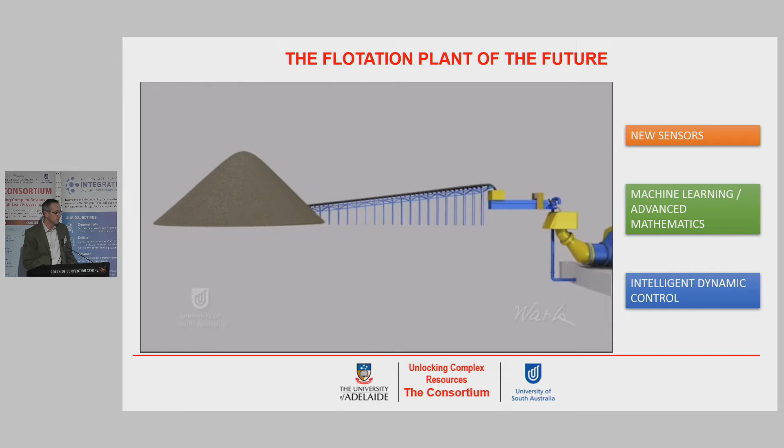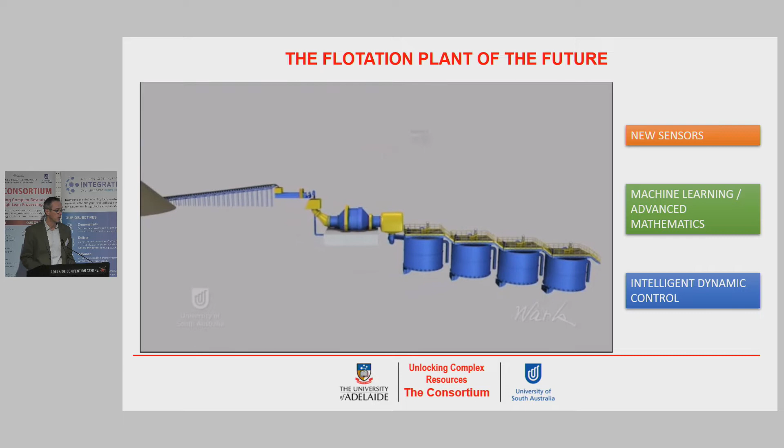So the flotation plant of the future - we can imagine that it will have a lot of new sensors positioned at different points around the concentrator. Inside the flotation cells and in different critical elements of the circuit, we will have new sensors, and these sensors will send information to the control room in real time. So we'll collect a lot of information about the process, which will flow to the control room.

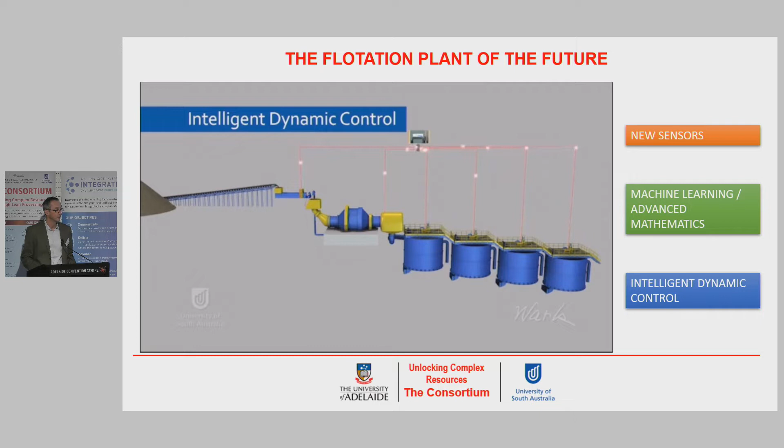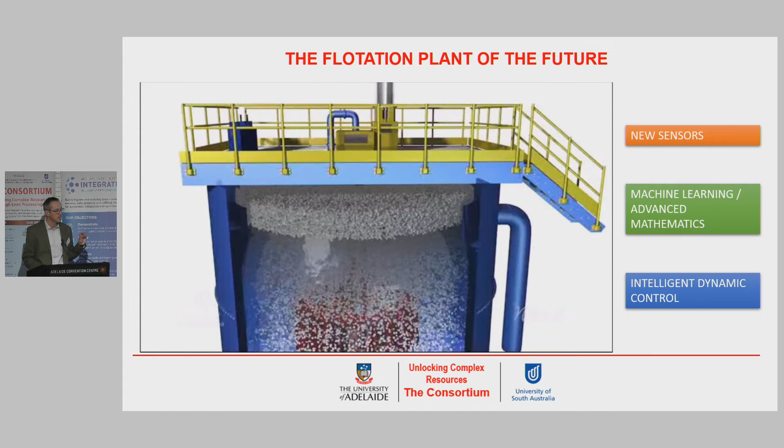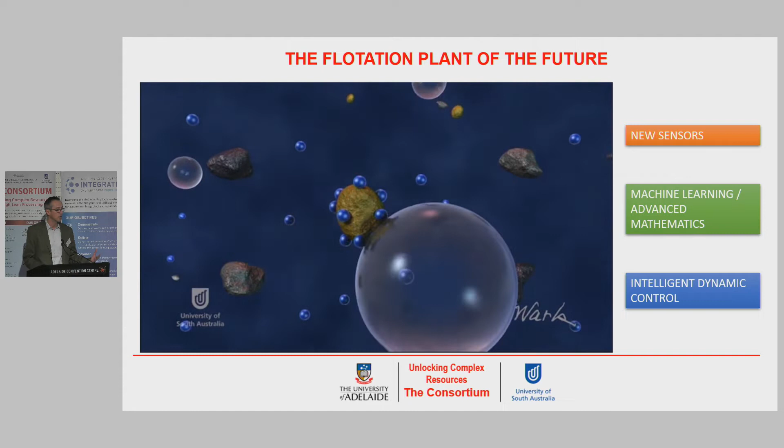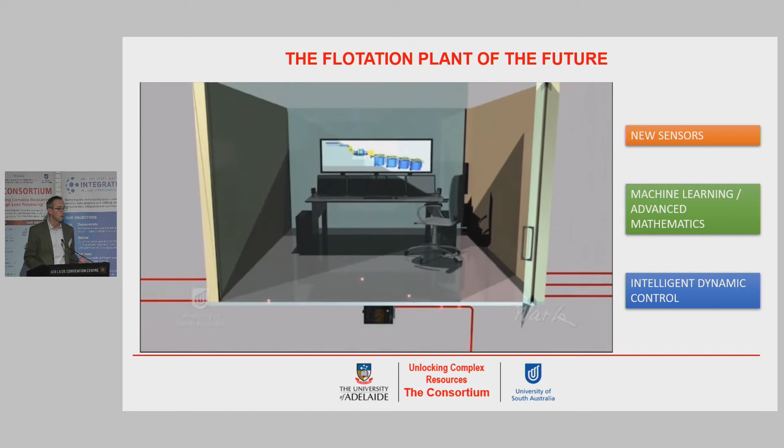And then in the control room, we will have advanced mathematics to process the data. But what do we want to see in the future concentrator? We want new sensors positioned to investigate inside the flotation cell, see what's happening to particles, investigate the chemistry of the process - how collectors are adsorbed on particles, how they become hydrophobic, and are transported to the concentrate. And to have this information real time from inside the flotation cell, traveling to the control room, where we can process the information and adjust the operating conditions to the optimum. That's, of course, our final goal.

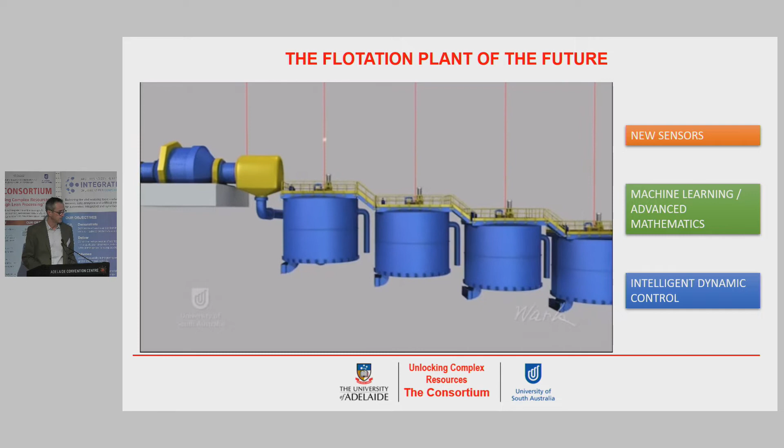So how do we get there? To get there, there is a need for new sensors - we need to sense parameters which currently are not properly measured. We need advanced mathematics and machine learning to achieve what I refer to as intelligent dynamic control. It's an interesting term because dynamic means real time, and intelligent because it's guided by artificial intelligence. So by a combination of new sensors and advanced mathematics, we will get to the flotation plant of the future.

Now, 20 years ago, a scenario like this was science fiction. Now, we are actually not that far from that, because all modern concentrators are already designed and built around this concept. But what can we do better? It's new sensors, and making better use of the information collected by these sensors - so better mathematics and better data analysis.

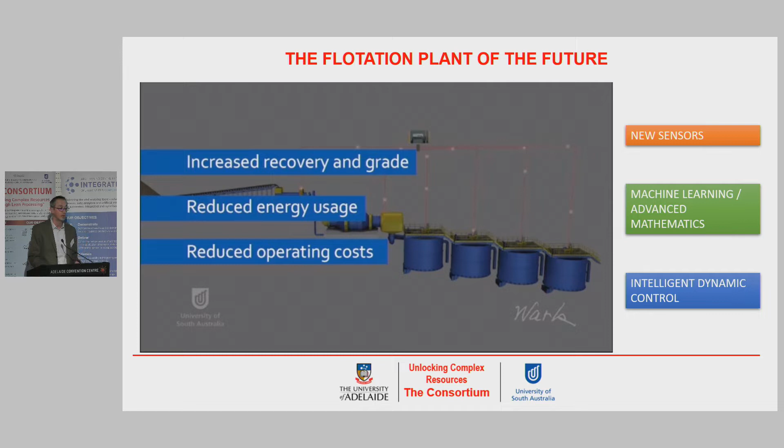So the question is, what are... why is people laughing? Right, okay, I have to say something. Someone may notice some resemblance between one of the wise men of flotation down there and Chris Greet.

It is just a lookalike. I don't want to be sued by Chris for using his image for my own purposes in my PowerPoints. It's just a coincidence. It is a lookalike.

But anyway, what should we sense in flotation? There are 3 different categories of variables which are really relevant. The first category is feed variables. We measure the composition of the flotation feed, which could be the chemical analysis, copper grade, for example, but also solids percent in the slurry, throughput, particle size, and possibly liberation of the different minerals.

Then we have process variables, where we measure the dosage of reagents, energy to the flotation cells, air flows, froth depth, and so many other things. And then some other relevant parameters, which is froth stability or characteristics of the froth, and mostly pulp chemistry, pH, EH, and DO. I put them in a different color because at the moment, yes, they are measured, but not everywhere and not in the right way, and not all the information is used properly, because we need to remember the message which is down there that the wise men of flotation tell us.

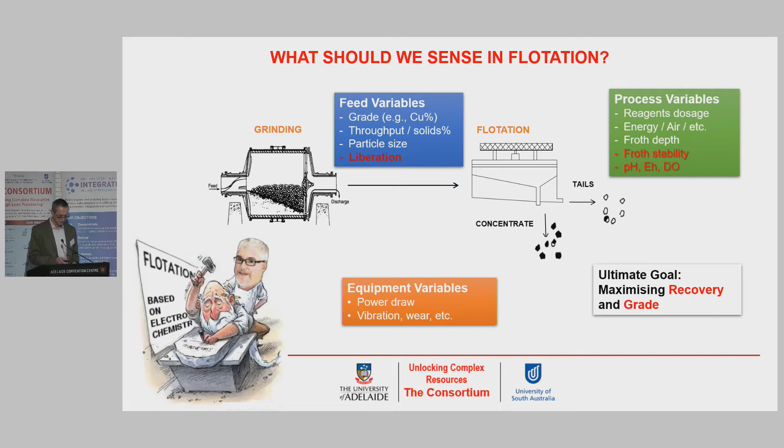So sensors for equipment monitoring, I consider them the low-hanging fruit, but they are very important. Basically, they're just there to detect abnormal events. And here I have just an example. An example of a sensor for abnormal events is acoustic monitoring of cyclones.

A very similar thing could be achieved, for example, with the new sensor that Defang was presenting this morning. It can be used to do the same thing, just to detect an abnormal event. The cyclone is not performing well anymore. We need to intervene as quick as possible.

So this is an example of an acoustic system which is out there, which is the CiDRA Cyclonetrac. Basically, by detecting an immediate change in the sound pressure, that means the overflow is changing. There are too many coarse particles in the overflow. We need to do something. So they are done to identify as early as possible that the equipment is not working as it should.

As I said, this is just one example. There could be many other things. I want to say in my discussion today, I'm just using some existing technologies which are functional to my discussion, but it's not a comprehensive overview. There are many others, and I'm not putting one on the top of other technologies. They're just there to explain what I'm going to say. So this is one example.

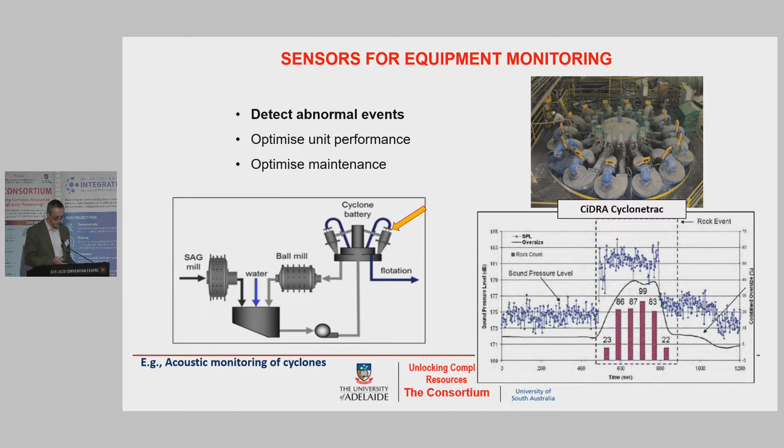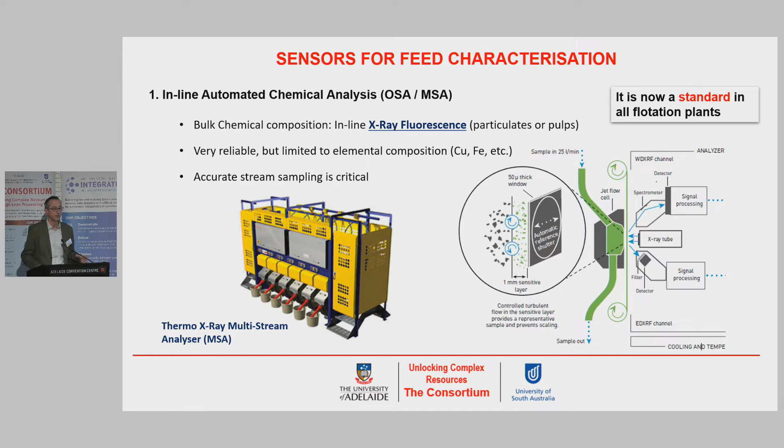Sensor for equipment monitoring. Then we have sensor for feed characterization, and I have to say this is now a standard in all flotation plants. So all flotation plants have, as an example, inline chemical analysis, the OSA or MSA system, which is based on X-ray fluorescence, XRF, and give us real-time chemical composition of different flotation streams. So we know our copper grade in our feed, concentrate, tailings, and whatever is needed in a concentrator. So definitely this is in the flotation concentrator of the future, but already is in most of the current flotation plants. So nothing new there.

But then we may want something more, because we know that flotation is very sensitive to particle size, and therefore very recently there has been a lot of interest in having inline and real-time particle size. And within the PRIF we have something like that as well.

So a couple of examples of how this can be done. There is automatical particle size done by laser diffractometry, which is a system which is out there and marketed by Outokumpu. It's basically like having a small Malvern Mastersizer embedded in an instrument which can put on site. So it's based on laser scattering. It can give a continuous particle size distribution, but at the same time it requires high dilution because laser scattering works at 1% solids. So it's very critical the way you collect your sample for particle size analysis from your stream.

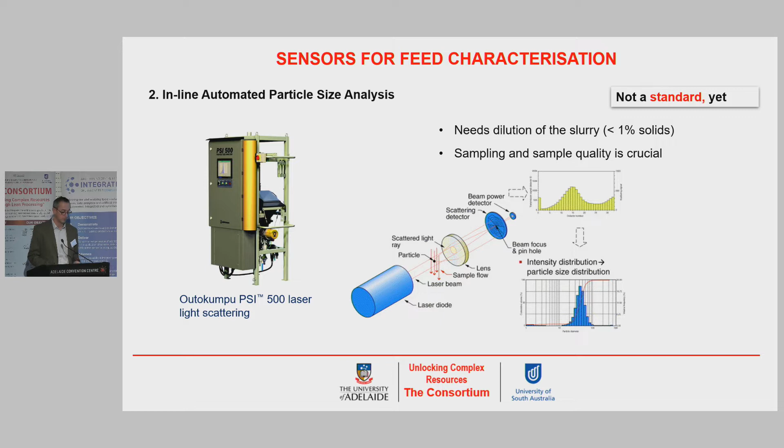And then there is ultrasonic attenuation. As an example, there is the instrument from Thermo, which uses a different mechanism to achieve the same thing, particle size. And there is something there. So I would say it's growing, and the flotation plant of the future will definitely be equipped with inline automatic particle size, not only for the flotation feed, but in different points of the circuit. So we will see more and more of this, and different technologies and different methodologies to achieve that.

And again, I go back to Defang.

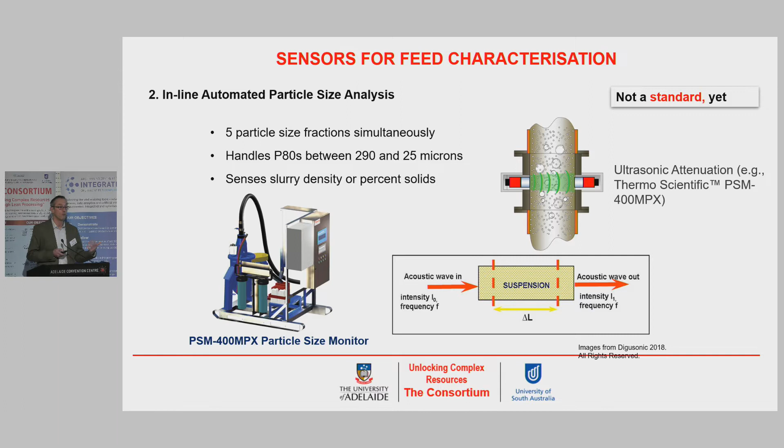There is room for improvement in this area. We have chemical analysis, but in flotation we actually float minerals, so we'd like to know the mineral composition of our flotation streams. We don't just want to know where copper is going, but where chalcopyrite, chalcocite, and pyrite are going. We want to distinguish between minerals.

So we want inline mineral assays. This can be achieved, and there is something already around. Some concentrators already have something like that in place, but it's not yet a standard. I would say in the flotation plant of the future, this will be a standard. Everyone will have mineral assays.

This is currently achieved, again with a couple of examples, by using near UV visible light. To complement the XRF data of the OSA, we have UV visible, which can interpret the information and give us the mineralogical composition. It can be very useful if we want to trace specific minerals in our flotation circuit. This will definitely be a standard in the future flotation plant.

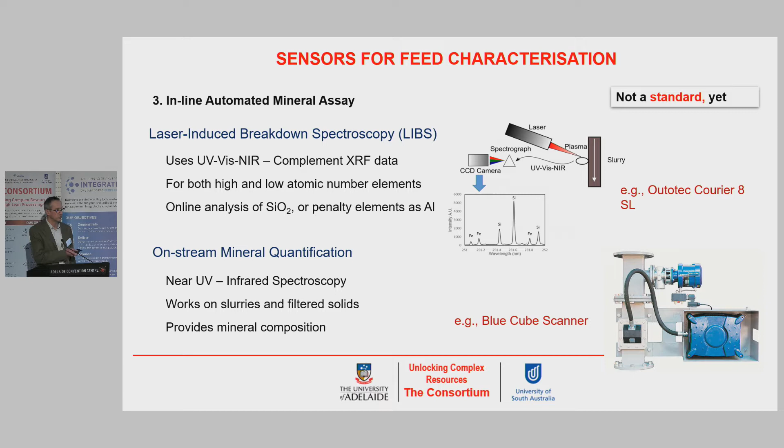But then one extra challenge: it's very important in flotation to measure liberation of mineral particles, because liberation of your value mineral will dictate your final recovery and concentrate grade. At the moment, the only standard way to do that is using QEMSCAN, which is very accurate but offline. It takes a couple of hours minimum, because you need sample preparation, put it under the instrument, take a measurement—so it doesn't give you real-time liberation.

So in the future, we will definitely have real-time liberation in the flotation plant. How do we get there? There is some research around—some promising, some less so—and I'll give a couple of examples I found very interesting myself.

One approach is using XRF as if it was a digital camera, taking an XRF photo of your sample, so that each individual pixel is an XRF signal with a different color. You can basically map the composition of your sample and identify different minerals, their composition, and liberation. At this stage this is really far from being available, but there is research around it, and it was very interesting as a concept.

And then we have microtomography, which is already used for liberation. It has, at the moment, similar problems as QEMSCAN in terms of being inline and immediately available. If you're familiar with tomography, you need to take a lot of projections of your sample, so it takes time—collect a sample, take it to a measuring chamber, take many projections, and reconstruct the 3D composition of your sample. It takes a couple of hours.

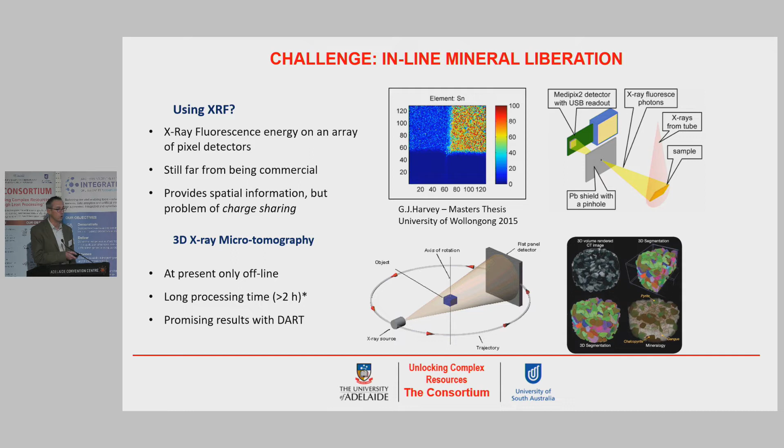And then froth visual analysis. This is very interesting, because froth visual analysis has been out for at least 20 years now. Every concentrator has, or used to have, froth cameras, but the use currently made of all the information that could be collected by froth cameras is minimal.

You go to concentrators, and most of the time froth cameras are there just to detect if the cell is producing any concentrate. Is it flowing? Is it not flowing? There is something wrong.

But all the useful information we could get in terms of composition of particles on the froth, bubble loading, and correlating visual analysis to concentrate grade and recovery, we are still behind because we don't use that information as well as we could. A lot of work has been done recently, and there is room for improvement in terms of using artificial intelligence to interpret the data from visual analysis.

And be more able to predict what's happening in the concentrator. Metso, for example, you're probably familiar with VisioFroth, which is considered to be the standard for visual analysis, are recently marketing a unit called FrothSense Plus, and they claim they use artificial intelligence and they can achieve these goals much more efficiently than in the past.

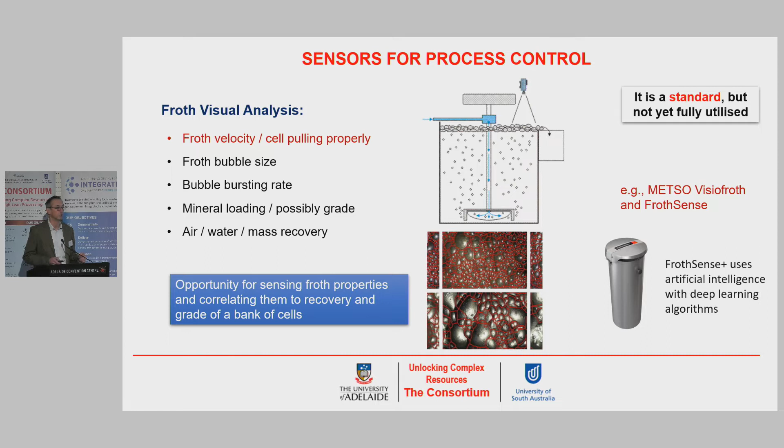But there is a lot which can still be done to improve the data analysis and what we can get out of visual analysis, because at the moment it's underutilized in most concentrators.

And then we move to pulp chemistry, and inline pulp chemistry, it's been one of the targets and goals within the PRIF, because it's very important. As we said before, we need to measure pulp chemistry if we want to have the process right. At the moment, pH, Eh, and DO are concepts that in some concentrators have meaning and they make use of them, in others they don't.

pH, there are probes everywhere, but maintenance is poor, they're not maintained and cleaned, and you need always to think that if in your plant you have your pH steady at target 7.5, and it's been steady at target for 2 months, that doesn't mean you have control of your process. It means your probe is broken. You need to go there and check that the reading is real.

So it's very interesting what Magotteaux has been designing in the last years, which is the MagoPulp, by which we can have a more reliable and continuous measurement of pulp chemistry, and pH, Eh, and DO in the plant of the future will be standard as a continuous measurement.

And inclusion of these parameters in data analytics and in machine learning, because it is ultimately chemistry which dictates recovery and grade. So this information will be available online. We are not far from achieving that, and the PRIF has been helping in this space, so it's very good, and we should be proud of what we are doing in this area.

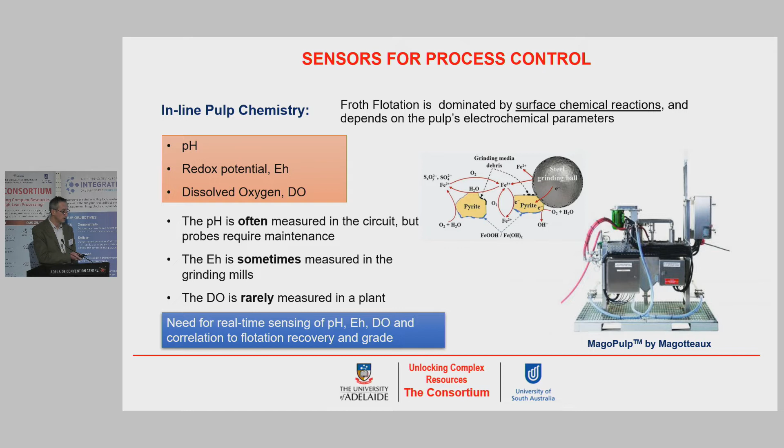And new pulp chemistry. I wanted to select just 2 of the very interesting talks which will come after mine as an example of what I strongly believe, and researchers in the PRIF believe, is that the future for sensing around flotation will improve sensing around pulp chemistry and what's related to chemistry.

So you will hear from Todd, for example, that it is possible to achieve real-time sensing for frother concentration in the system, which will be great, because then we know if what we are adding is doing what it's supposed to be doing. Maybe that can be extended to collectors, a step forward, so we know if our collector is going to the mineral surfaces, or if we are just wasting money throwing in a lot of xanthate, which is doing nothing to the system.

So having this real time will be a step forward, and I believe that this will be in the concentrator of the future. And again, what Linda is doing, detecting critical ions in the system.

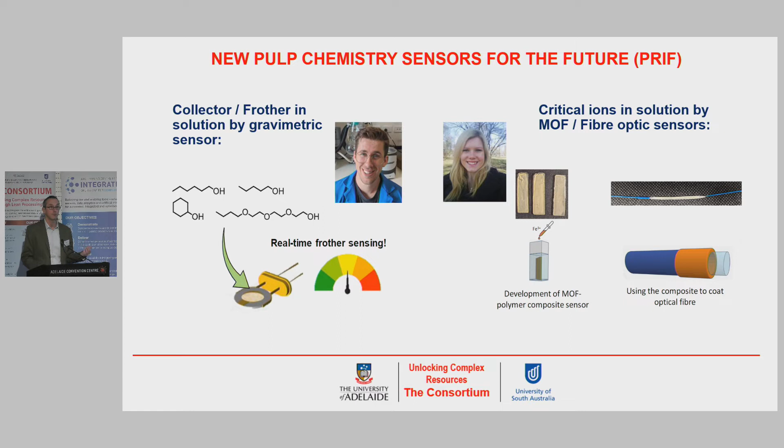She's doing that now for leaching and detecting ferric ions, but that may find applications in flotation as well. We may be able to have a sort of fiber-optic sensor which will tell us your pyrite is getting activated and it's floating, your chalcopyrite is oxidizing, and we can control that because we can have real-time measurement of ions in solution. So in the future, sensing of chemistry will be definitely there and stronger in the flotation plant of the future.

Now, to conclude, how to get there? What's the step? Well, Adrian this morning explained this concept in a much more educated way, giving a lot of examples of how this should properly happen if all people involved are doing their part.

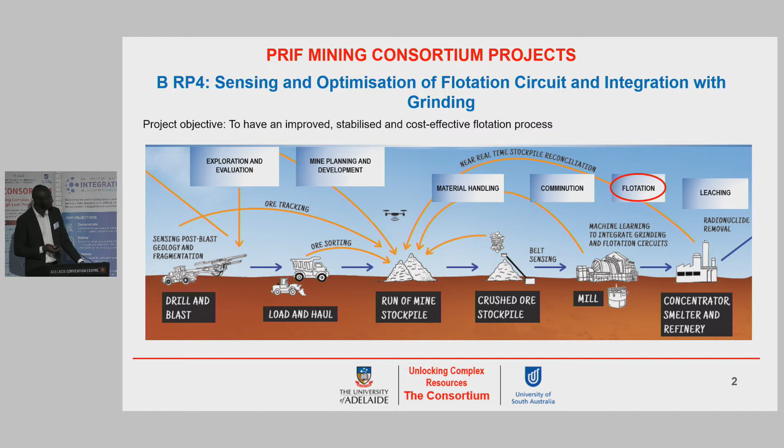Since the commencement of my project, these are the main key findings that I have. The first one is that Gaussian process regression model can make good copper recovery and grade prediction. The second one is that Pareto search algorithm finds the optimum operating point that will see to the maximization of copper recovery and grade.

And finally, we've been able to ascertain that pulp chemistry indeed is very essential when it comes to the prediction of rougher copper recovery. And these findings are useful.

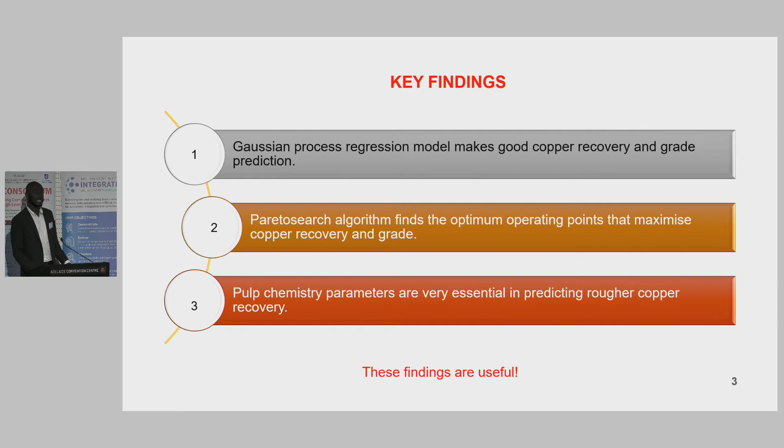So just like in the world of sports, no coach would like to change his or her winning team. Likewise, on the plant, it's not advisable to play with your set parameters or set points of variables. But with the model that we have, we have the flexibility to simulate rougher copper recovery and grade.

And this will give you an idea of what to expect when you are to vary a particular variable in a range. Ultimately, the model that we have at the moment can be integrated into a model-based predictive controller, and this will help to have process control of the system.

In model-based predictive controller, what happens is that the predictive model of the system is used to predict the future behavior of the process, and they are very effective for multivariable processes like flotation.

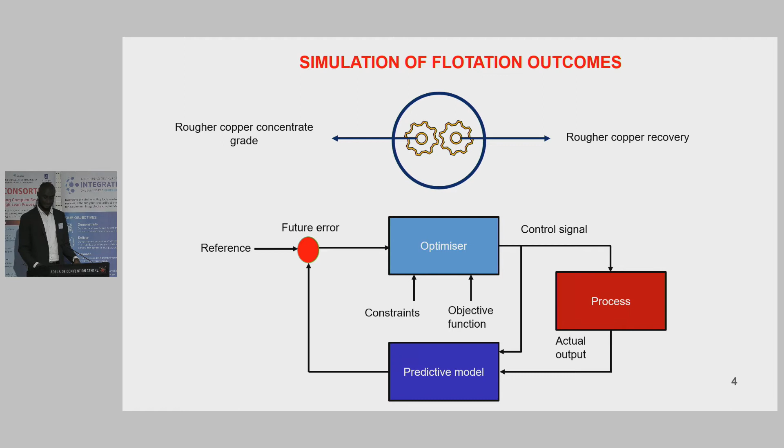We know that fluctuations in the performance of flotation mostly emanate from the operation of the various variables at different set points. So with the optimum values that we have at the moment, we hope to have a more stabilized and robust flotation process on the plant.

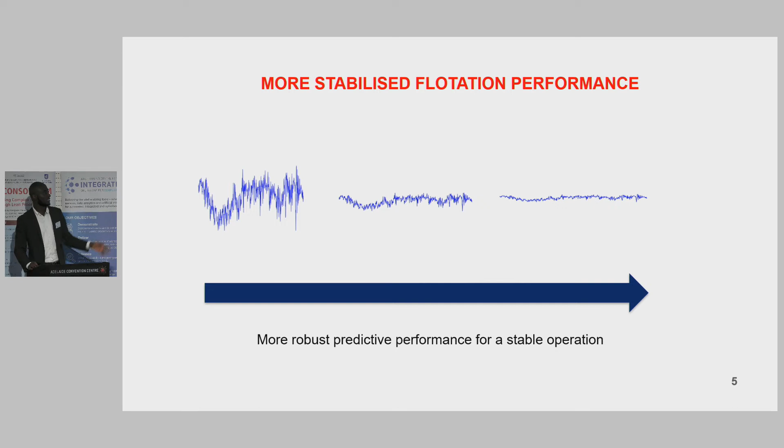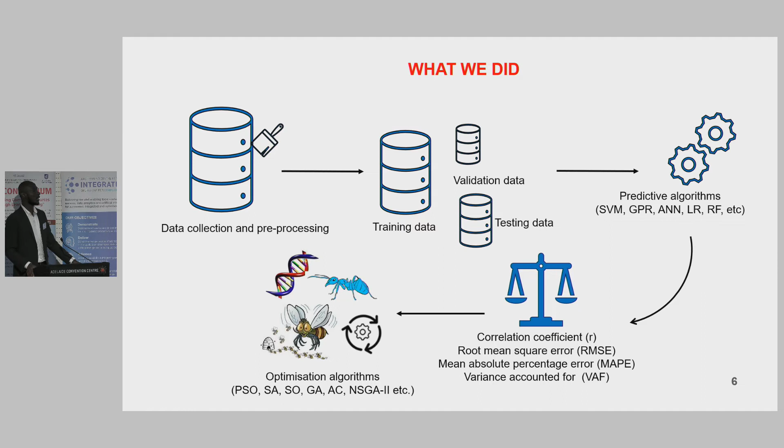Basically, these algorithms operate by first establishing a correlation matrix between the various input and output variables. Based on this correlation matrix or predictive function, it's able to make new predictions when you give it new data. After the development of the models, we have standards that are used to assess the performance of the models.

And the standards that we considered in this work included correlation coefficient, root mean square error, mean absolute percentage error, and variance accounted for. So for a good model, we expect the R values to be approaching 1. In terms of the error statistics, we expect them to be minimum as much as possible, approaching 0. And for the variance accounted for, we expect values close to 100%.

So after the assessment, based on the best performing model, we extract the predictive function of that model, and we use that predictive function as the objective function for optimization. For optimization, there have been previous presentations that talked about the operation of optimization algorithms, so I'm not going to talk about that here.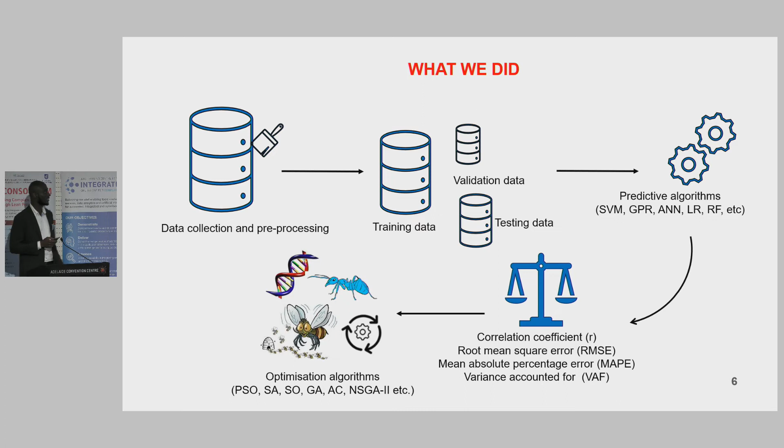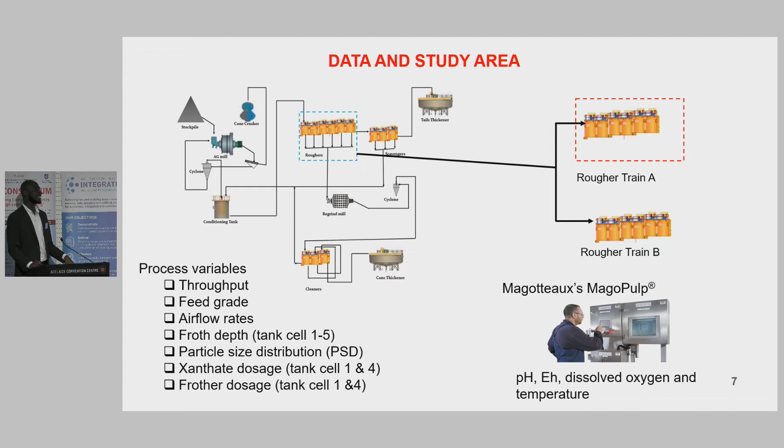So this is the data and study area that we considered in our work. We collected the data mainly from the rougher circuit of BHP Olympic Dam, specifically from the rougher train A. We also made use of MagoPulp in collecting pulp chemistry data in terms of pH, EH, dissolved oxygen, and temperature. So these are the main data sets that we considered in our work.

So this image here shows the prediction that we did with our model in terms of copper recovery and grade. And looking at the statistics, it shows that our model is actually doing a good job when it comes to the prediction of the output of the process at BHP Olympic Dam.

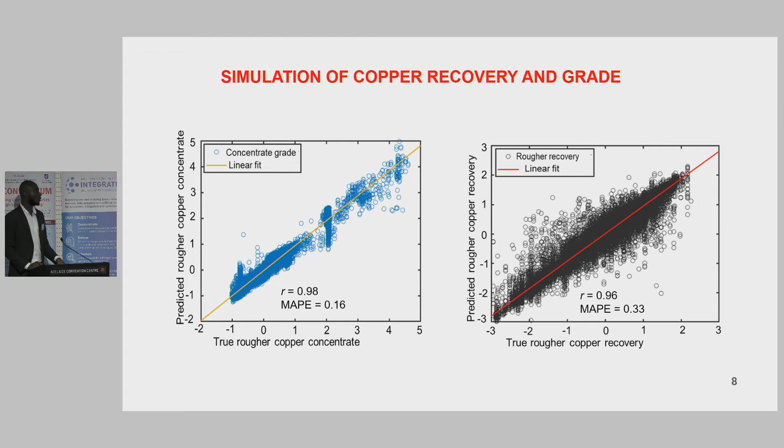This work also shows we wanted to ascertain the impact of feed grade and feed particle size on the optimum values that we have. Because as much as we have optimum operating values for variables like feed grade and feed particle size, it's very difficult to keep them at a particular value. So we did a simulation where we varied feed grade and feed particle size simultaneously, but kept all other variables at their optimum values as found by the various optimization algorithms.

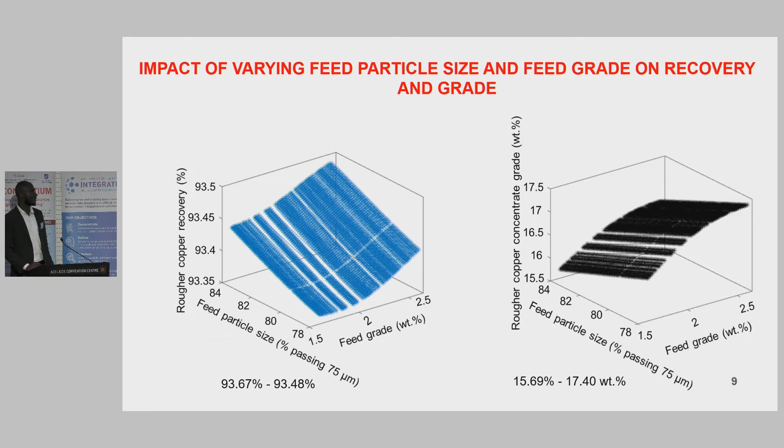And from these results, we realized that if we are to go by this approach, we can have a near optimal recovery and grade with the values that we have at the moment.

So going through literature, we realized that even though machine learning models have higher accuracy and very good predictive performance, the work done so far mostly wouldn't include pulp chemistry parameters. So with the little data we have on pulp chemistry from BHP, we first modeled with just plant variables, shown in the image on the left. After that, we included the pulp chemistry variables in terms of pH, EH, dissolved oxygen, and temperature. And from this slide, we can see an improvement in the performance of the model that we developed.

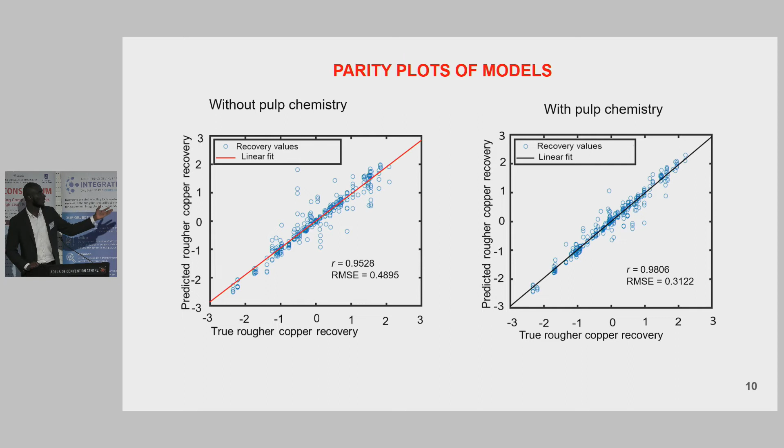So future recommendation is that, to date, we know that pulp chemistry is very essential when it comes to the prediction of the recovery of the process. However, we have very little data at hand. So we recommend that more data on pulp chemistry should be collected in order to validate some of the work that we have.

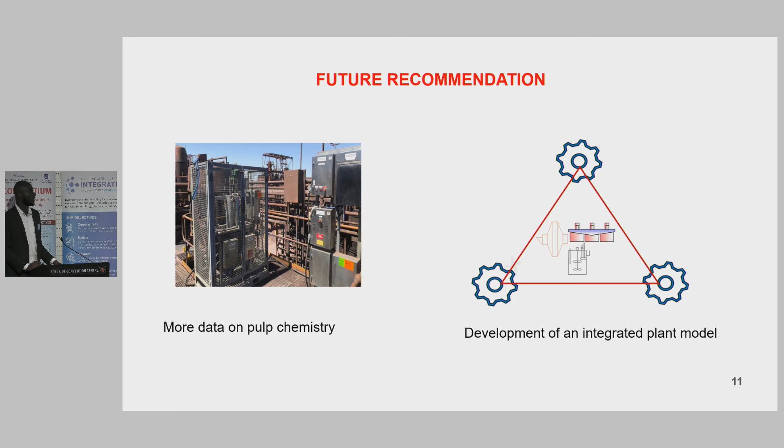And also, since the Gaussian process regression model has proven itself when it comes to the prediction of the metallurgical output of flotation, we are also recommending that models should be built for the grinding circuits and the hydromet section so that overall we can have an integrated model for the plant.

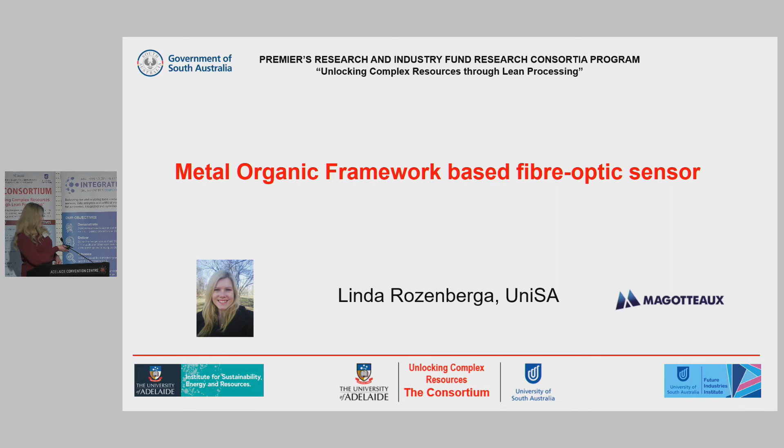The goal of this project is to develop a sensor that can quickly and accurately measure how much iron 3 we have in leaching processes.

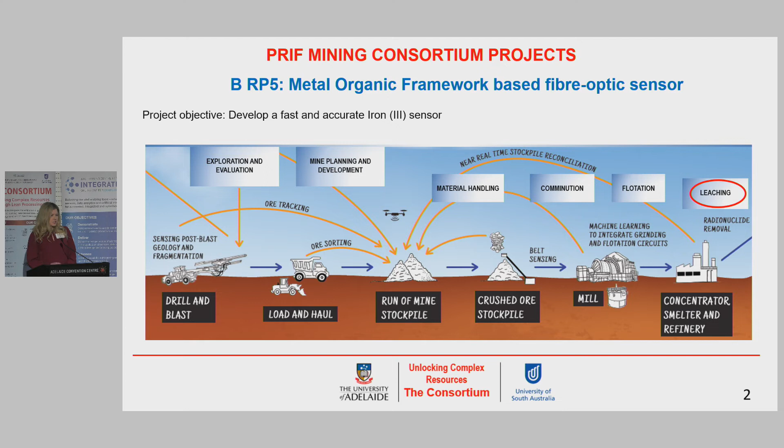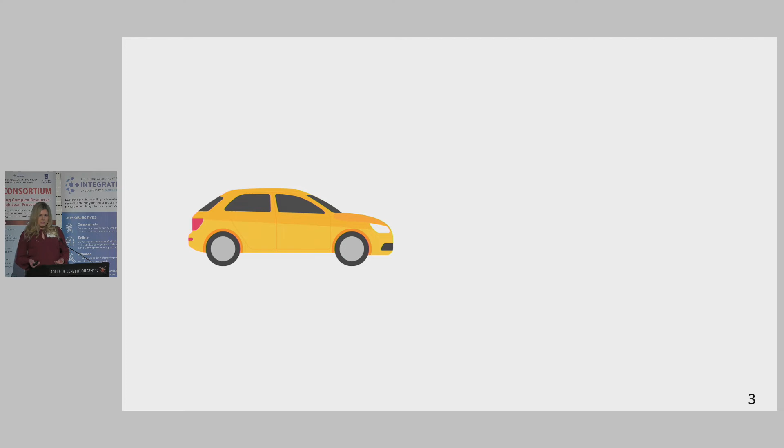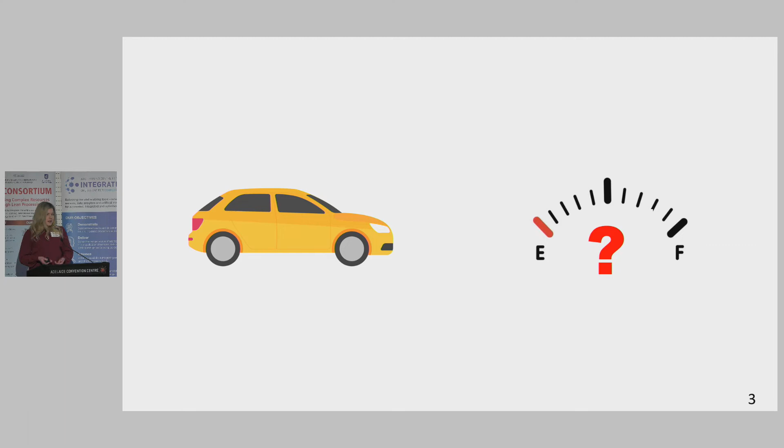But before we get into the science, I would like to invite you to think about our everyday lives. Many of us have a car we use to drive to work, and we rely on a fuel gauge to let us know how much fuel we have left. Imagine if we didn't have that. If we get in the car in the morning with no idea how much fuel we have, are we going to get stranded on the side of the road, or are we going to stop at the petrol station unnecessarily and waste our precious time?

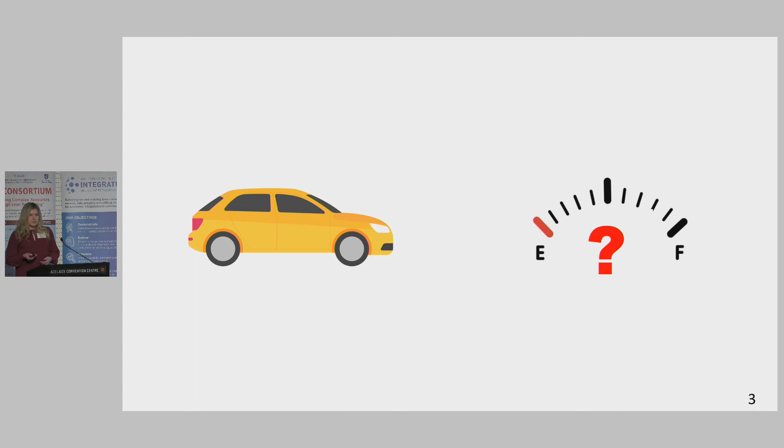Or another example: let's say you're not feeling well and your doctor asks you to do a blood test. A typical blood test would take about 3 days to get the results back. But imagine if it actually took 3 weeks, and what effect that could have on your health.

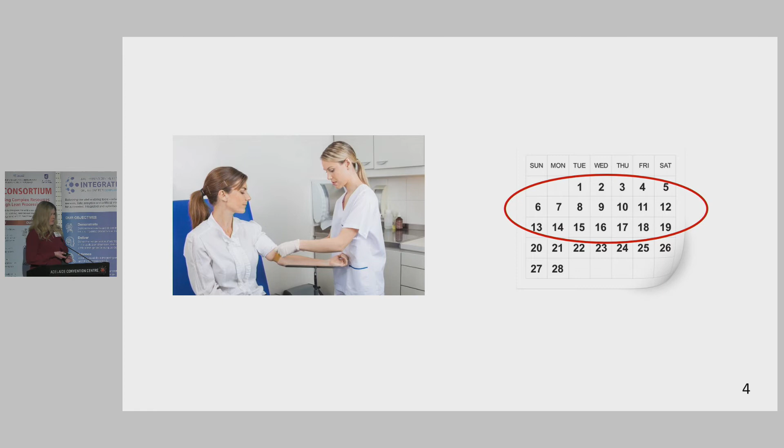So we don't want to face risk and uncertainty in our everyday lives, so why would we allow them in the key processes of the business?

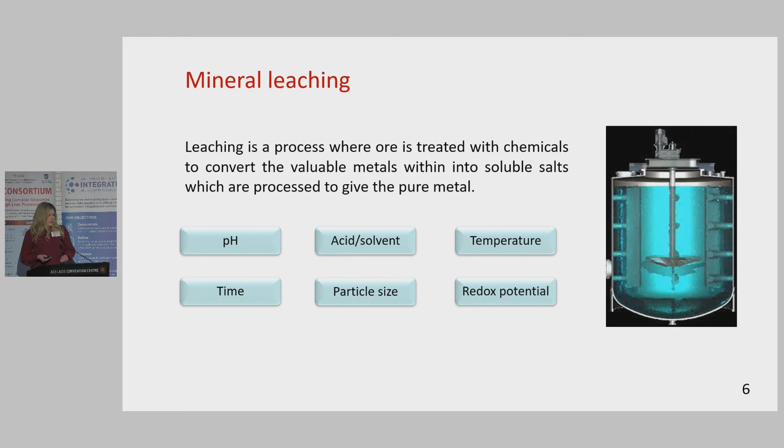Now let's return to mineral leaching. It's a process where we dissolve the ore in acid or solvent to recover the valuable mineral, and it is governed by several different parameters since it's a chemical reaction. For example, pH, time, and temperature, which are fairly easy to measure and control. Others are a bit more tricky, like particle size and particularly the redox potential.

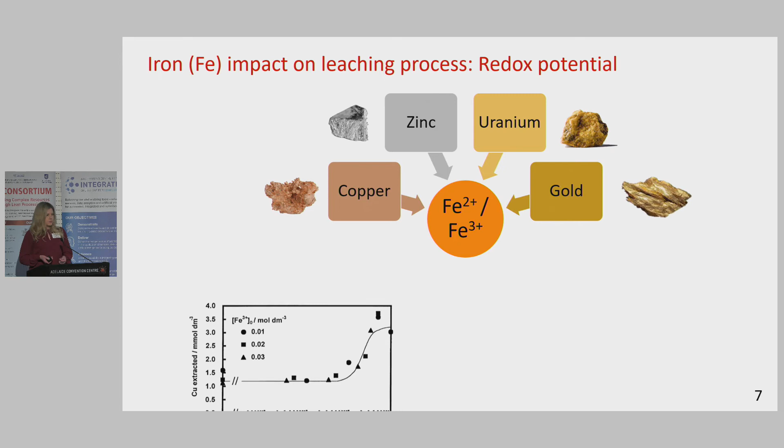In the leaching process of copper, zinc, uranium, and gold, the redox potential is controlled by the ratio of iron 2 to iron 3 ions. For example, a study done in 2001 showed that optimizing the iron 2 to iron 3 ratio in copper leaching allowed the authors to increase copper recovery up to 3 times.

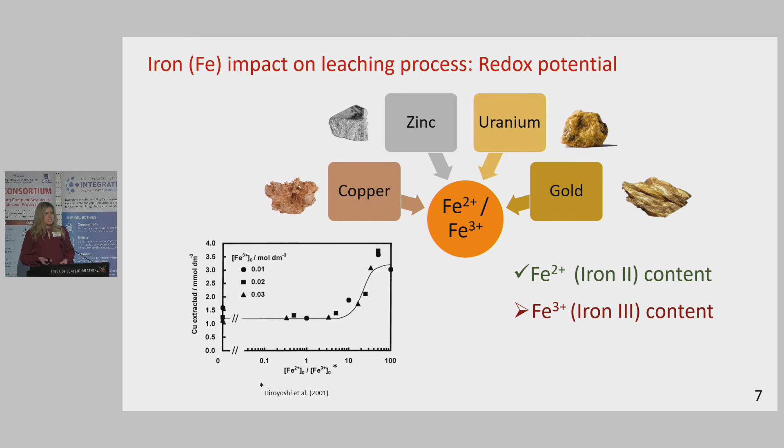We have good, reliable methods to measure iron 2 concentration in solutions. However, iron 3 concentration is a lot more difficult to measure. It requires extensive sample pretreatment, expensive and complicated equipment, it's a long process, and often the measurement we obtain is not exact and precise because we're not determining the iron concentration directly.

So as an alternative, we are offering to develop a luminescence-based sensor. Luminescence is the ability of some materials to absorb light and then emit it at a different wavelength, and you might be familiar with these materials as glow-in-the-dark materials or paints. Luminescence sensors are known to be very fast, accurate, and selective.

So we split my project into 3 parts. In the first part, we needed to find a chemical that would be luminescent and respond to the presence of iron 3. Then we needed to take this material, metal organic framework, or MOF for short, and encapsulate it in a polymer matrix to hold the powder crystalline particles together in one place. Then we use this composite material to coat optical fiber and fabricate a practical sensor.

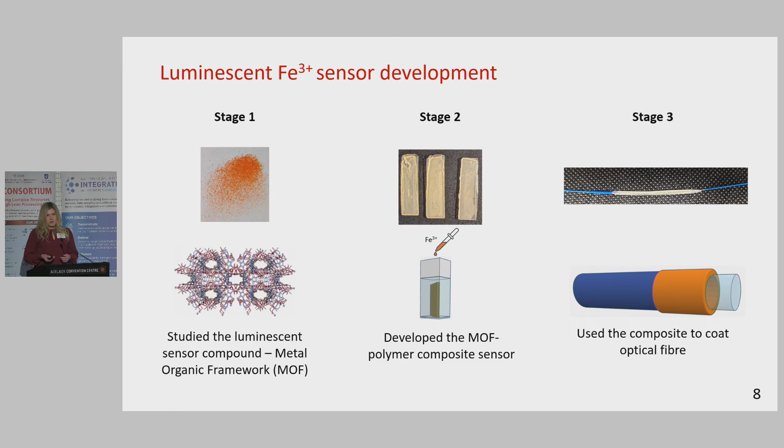In the first stage, after we selected a potential MOF from the literature, we performed an in-depth study to understand its properties and limitations. We determined new information on the MOF structure that hadn't been published before. We optimized the synthesis to increase the yield from 4% to 32%, and we also looked into why we have a response from the MOF crystal to the presence of ferric ions, why we see the change in the emitted color and the intensity of the light.

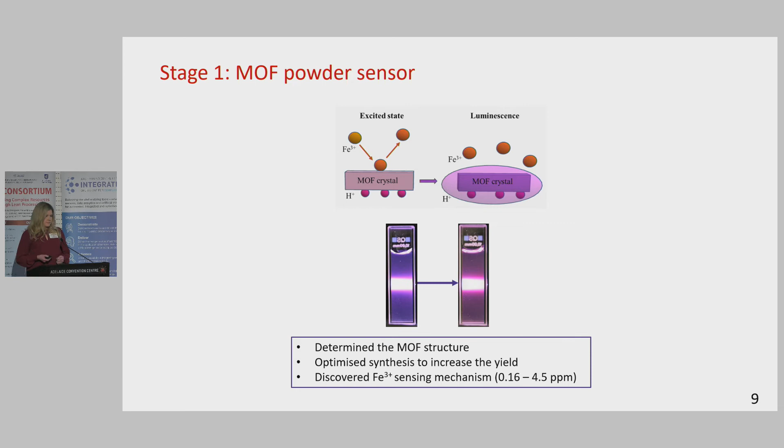When we encapsulated this powdered material in a polymer composite, we saw that these two materials have a synergetic relationship. The polymer increased the luminescence intensity, which you can see in the first graph. In red, we have the intensity of light emitted by the MOF powder, versus in purple, where we have this composite material's luminescence intensity.

This is important because the intensity of the light is what we use to measure how much iron we have in our solution. That also increased the sensing range of the sensor. As a powder material, this MOF senses up to 4 parts per million of iron 3, while as a composite, it could sense up to 120 parts per million.

It also made the sensor reusable, and we started testing simulated leaching conditions to see how decrease in pH and presence of other metal ions would affect the sensor. We found out that only iron 3 causes a decrease in the intensity of light emitted by our sensor.

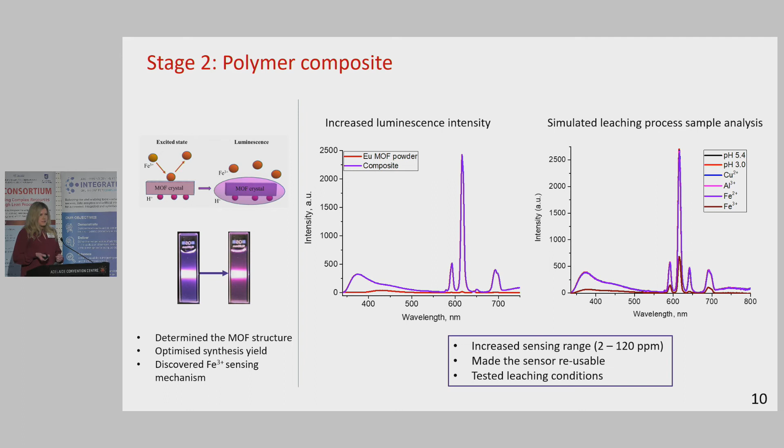Then lastly, we developed the optical fiber coating process, and we established the prototype sensor setup. We also further increased the sensing range. Now it's from 0.1 to 1.4 grams per liter, which is a lot closer to actual industrial processes.

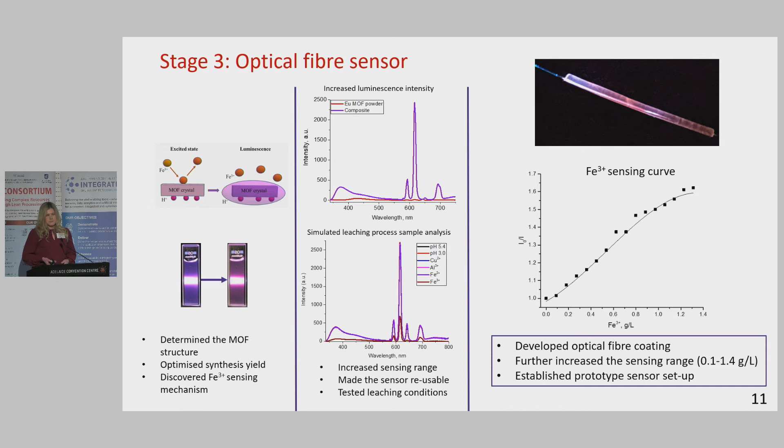So if we wanted to use the sensor we're developing, first we would have this sensor suspended in a water cell to keep the polymer hydrated and to allow the ions to penetrate the polymer structure and interact with our MOF sensor. Then we would measure the light intensity emitted by the sensor without any iron present, and then measure again the intensity of light with iron present. If we measure the ratio between these two intensities, we can determine exactly how much iron we had in our sample to begin with.

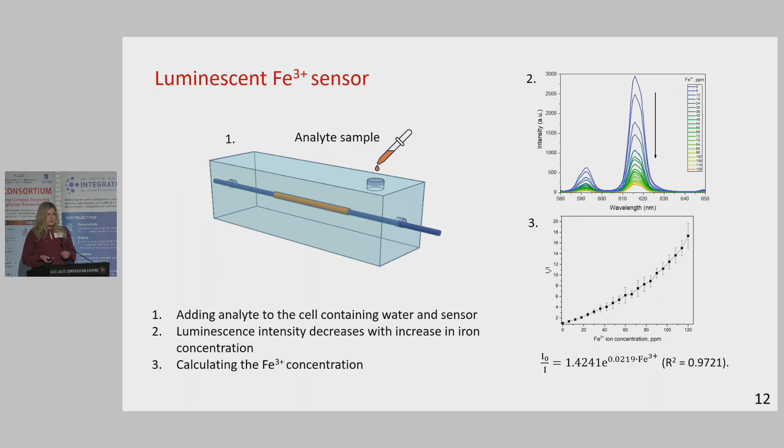Now, working in a laboratory is not always as exciting and fast-paced as it can be portrayed in movies and TV shows. A lot of times it's a very time-consuming and repetitive process. So for example, if I was asked to analyze how much iron I have in a sample, it would take me several steps to get to the measurement process. I would need to dilute the sample, adjust the pH, remove any impurities, prepare the solution for measurement, and only then would I get to the testing point and then to the analysis to determine how much iron I had in the sample.

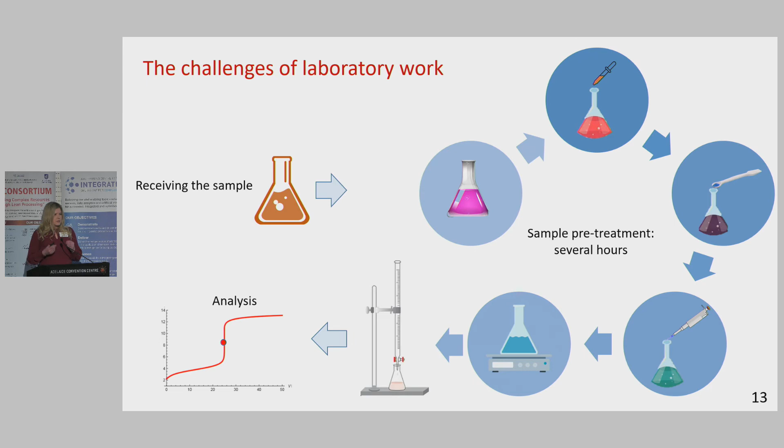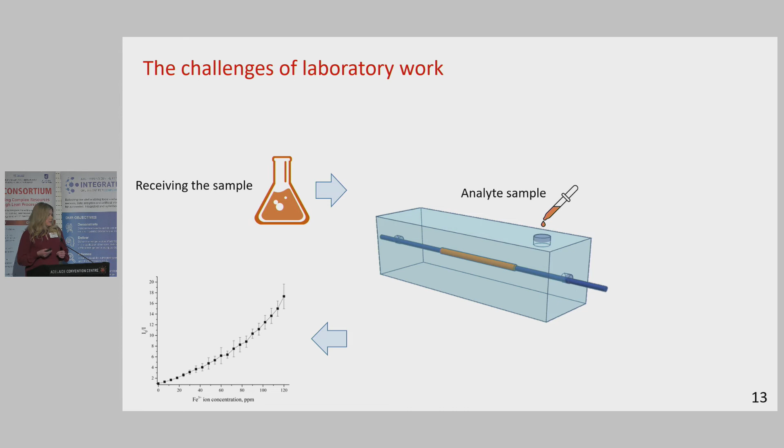But if we were using the sensor we're developing, we're skipping all of these steps and going straight to the analysis and determining how much iron we have. That would not only save time for the employees, but also would provide us with close to real-time process monitoring and precise measurement of how much iron we have in our process, which would allow us to optimize the leaching process. It would also increase the copper or other mineral recovery rates and save money and resources for the company.

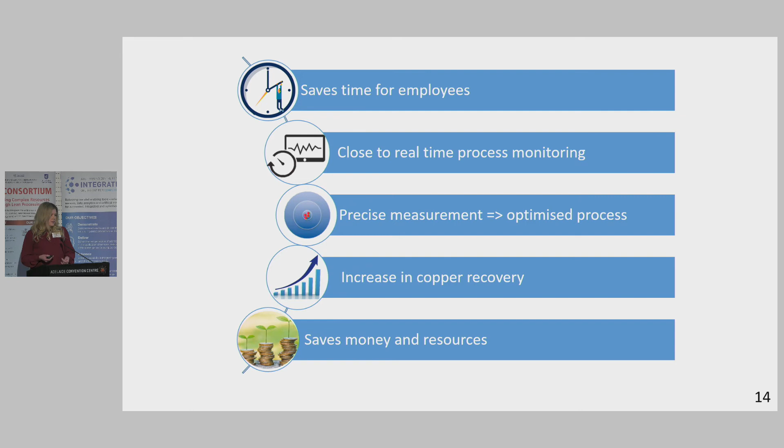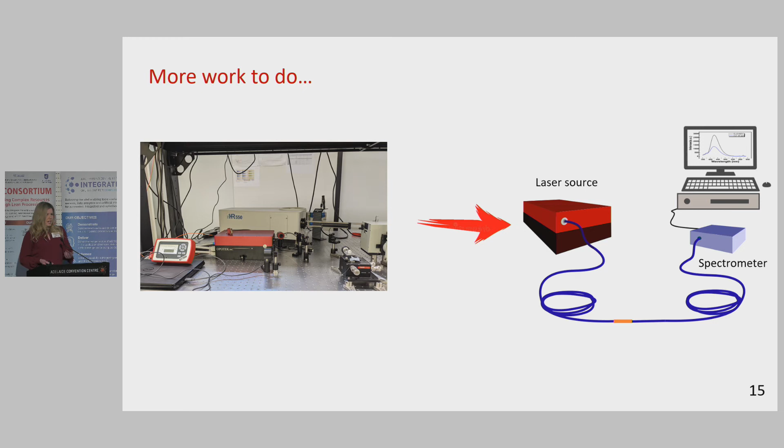The sensor is not only potentially applicable in mineral leaching processes. Iron 3 affects, for example, drinking water quality. It can give water an unpleasant color and cause negative health effects, so we could use the sensor to control drinking water quality. It can also potentially be used in medical and biological settings, because not enough iron in the human body can cause anemia, while too much has been linked to Parkinson's and Alzheimer's disease development. We could also use it to control the iron concentration in wastewater. Too much iron 3 in the environment can cause bacteria and algae growth and the death of aquatic plants and animals. So there are many different potential applications for this sensor that we are developing.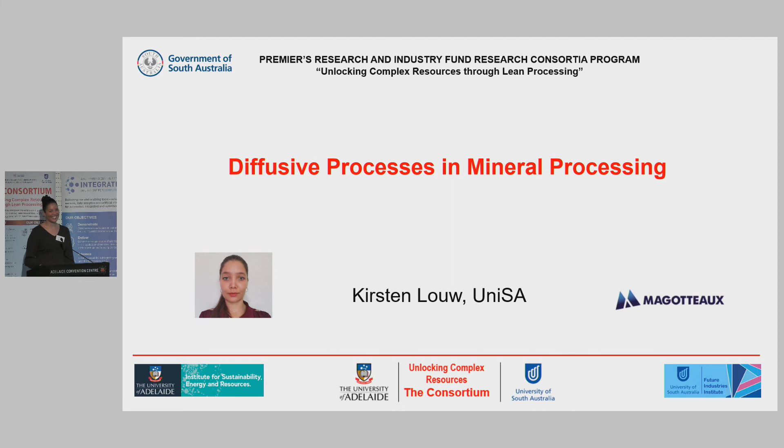Hello, everyone. So my project is right at the end of the mining process, and I happen to be the only mathematician in the group. So if you have a problem, fantastic, approach us. Approach a mathematician. We are very helpful at solving problems. We use mathematical models to describe systems, to gain further insight into a problem, and to provide answers to your questions. But don't worry, I'm not going to go into any detailed maths today.

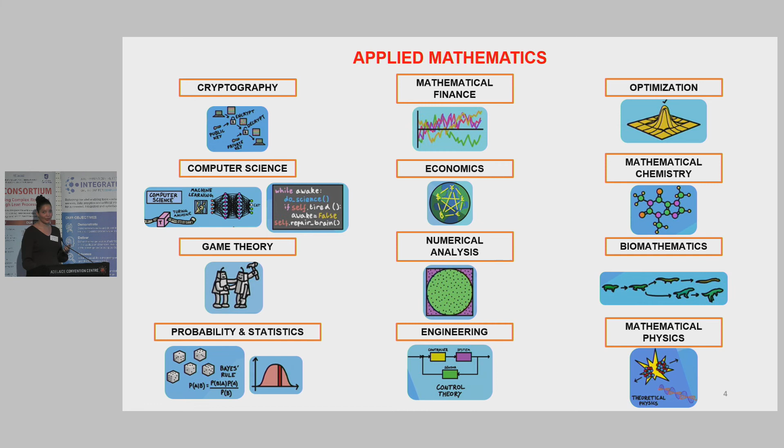And in particular, I'm an applied mathematician, and there are many subsets to applied mathematics. You have been introduced to a few of those subsets, namely optimization, computer science in terms of machine learning, and statistical modeling. Where I come in is with the sensor.

Linda's work and my work are very closely interconnected, where Linda is creating a sensor to detect ferric ion concentration. This sensor is made up of an optic fiber with a MOF polymer coating. The sensor is submerged into a solution containing ferric ions. These ferric ions associate to these MOF crystals, and so when we pulse a light, send a light source through the sensor, changes in luminescence are detected and the signal is processed.

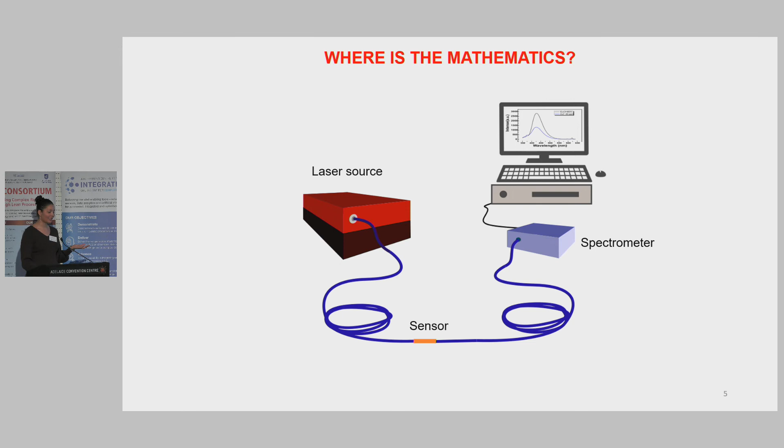And you might ask yourself, but where is the mathematics? It is located at the sensor. We use mathematics to understand how iron 3 interacts with these crystals and how it interacts with the sensor. And we study this in two parts. In the microenvironment, we look at how iron 3 interacts with the crystals embedded into the polymer, because this interaction is what influences the changes in luminescence.

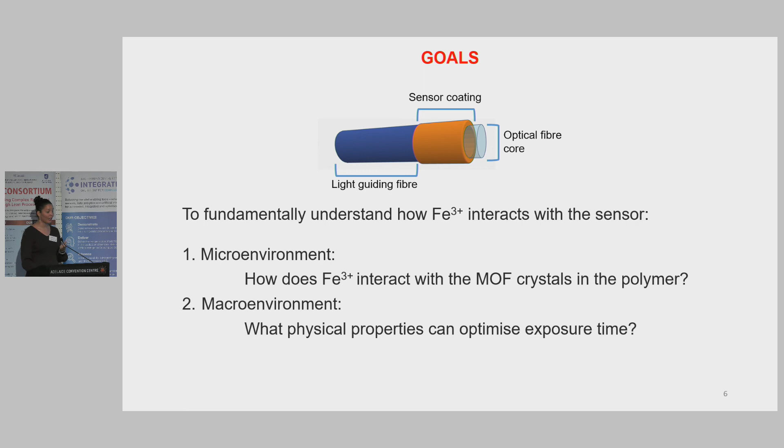Then we can ask the question, how does iron 3 interact with the MOF crystals? In the macroenvironment, we study how iron 3 travels through solution and through the polymer to interact with the MOF crystals, because if we understand this, we know how long to expose the sensor to get an accurate reading. And then we ask the question, what physical properties can optimize exposure time?

Looking at the microenvironment, what we see on the left-hand side is what the crystals look like in real life. But I'm really interested in what these crystal structures look like at an atomic level. So in the middle, we have a top view of the atomic structure. And if we look at a pore, these pores have depth, so you have a column of atoms going into the slide.

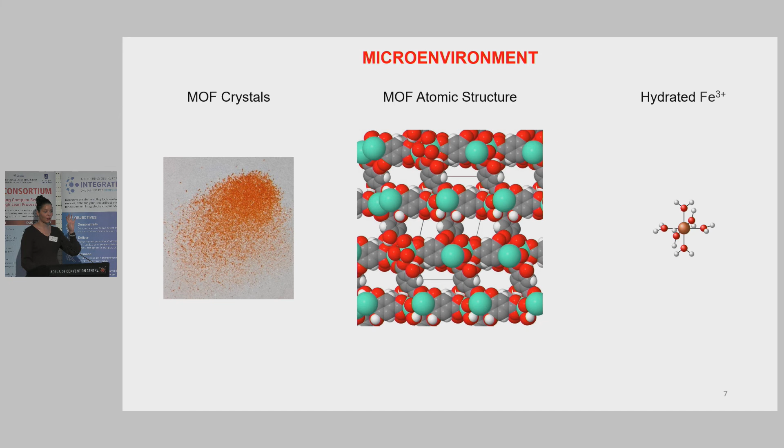And then we are looking at the interaction of these pores with the hydrated iron. So on your right-hand side, you have the iron in the middle, surrounded by water molecules. And we want to know how this hydrated iron interacts with the MOF crystal.

There are two ways to calculate interaction energies and forces. The first one is molecular dynamics, where we look at the atom-to-atom interactions. So if we isolate a pore and we take hydrogen from the hydrated ferric ion, we look at how this hydrogen interacts with each of the atoms in this pore.

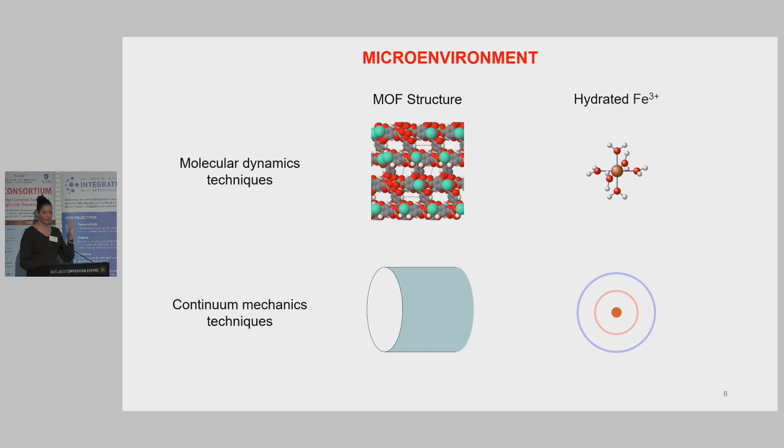In the second approach, we use continuum mechanics, and this is the approach that I've used. So instead of looking at atom interactions, we are considering shape-to-shape interactions. If we isolate a pore, we approximate it using a cylinder. And for the hydrated ion, we approximate it by a point and two concentric spheres. And now we can answer our question, how does iron 3 interact with the MOF crystals?

We found out iron 3 is attracted to the MOF crystal, however it's too large to fit inside the cavities. This isn't bad news, this is actually good news, because it means we can reuse the sensor, and this is a cost saving. Some additional insights: our method is about 500 times faster than molecular dynamics and still provides reliable results.

We also found that other metal ions are attracted to this crystal, but this crystal in particular is iron 3 selective in terms of sensing.

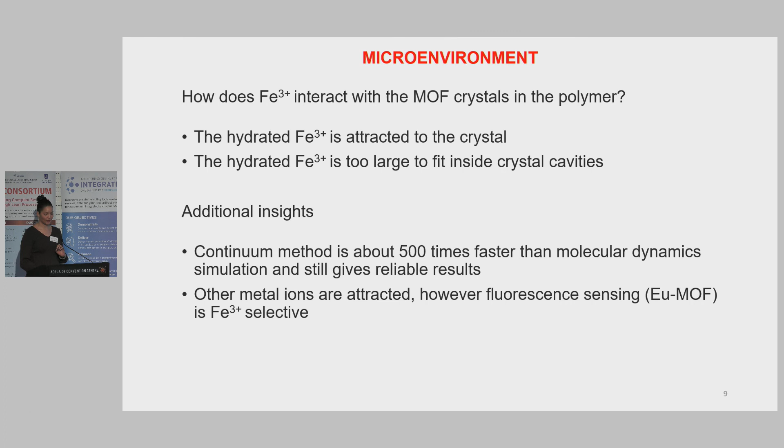Taking a step back and looking at the macro environment, in the lab it's a very controlled environment, so we know the concentration of iron 3 in a solution. However, on site or at the mine, we don't know what that is. So we want to know how iron 3 diffuses through solution, the polymer, to interact with the crystal.

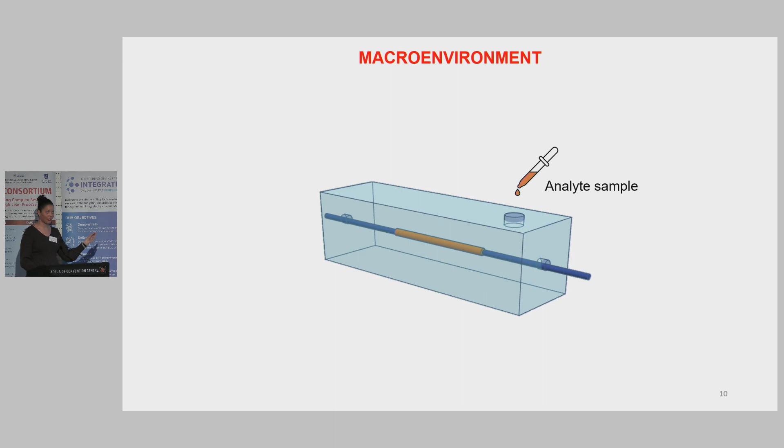Then we can study properties that can affect sensing time: the diffusivity of iron 3 in solution and the polymer, and the relative sizes between the two diffusion constants, the association rate — how quickly iron 3 binds to the crystal — and dissociation rate — how quickly iron 3 unbinds from the crystal — and the flux of iron 3 at the crystal.

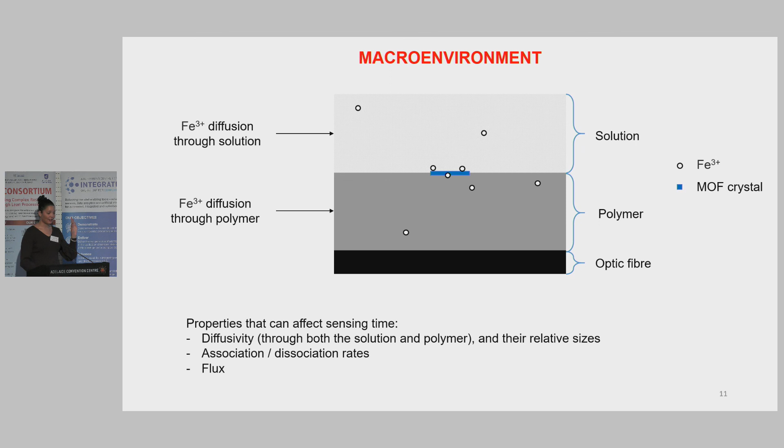From these four properties we can now answer our question. If we increase diffusivity and association rate, and decrease flux, we have a shorter exposure time. If we decrease diffusivity in the polymer, we do have shorter exposure time, but this makes for poor sensor functionality because it only decreases sensor time for crystals at the surface of the polymer. What we also found out is that knowing the dissociation rate helps predict iron 3 concentration in a solution.

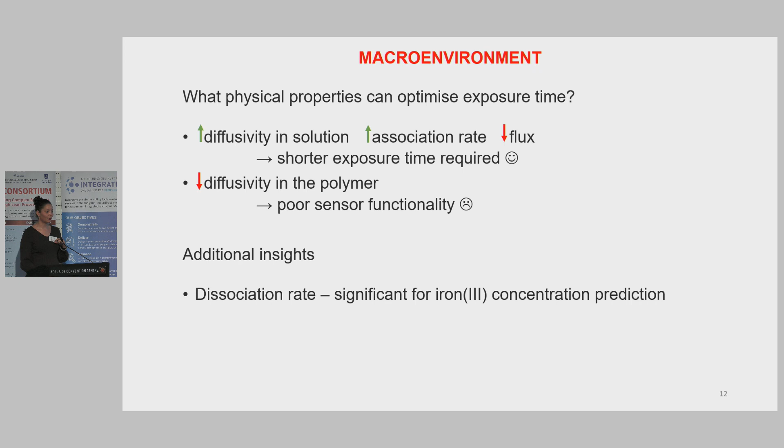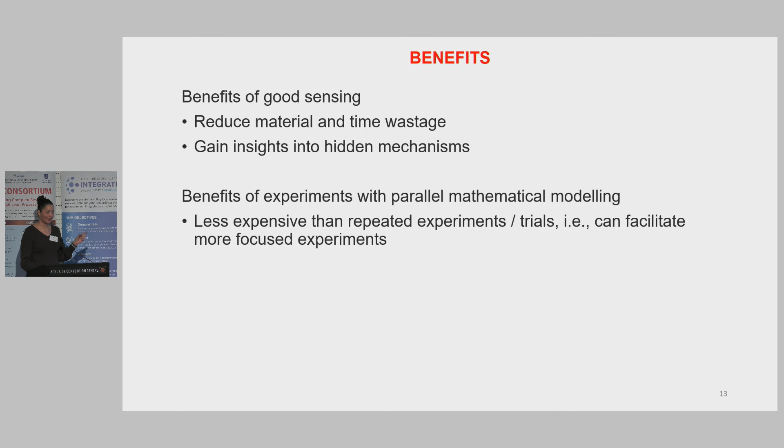The benefits of this is having a good sensor means reduced material and time wastage, and we gain further insight into the system. Having a mathematician alongside experiments means there is less time wastage on experiments, with a shorter parameter testing for different variables.

I would encourage you to find a mathematician. But first you need to highlight that you have a problem, and then seek out our help. We are friendly enough. I would like to thank all of these lovely people, the state government, PRIF, and UniSA. Thank you.

Do we have a question for Kirsten? Kathy. What's your next little chore there? What's your next task with your mathematics? In the project, PhD, or in life?

You choose the answer. In my PhD I'm going to do more mathematical investigations into the systems of equations. It's interesting for me, but I don't know if the results will be as interesting for you guys. It's going to be very math heavy, really mathematically inclined. So it will feed into the math space in terms of research.

And after? Oh, that's a surprise to all of us. Requires a job.